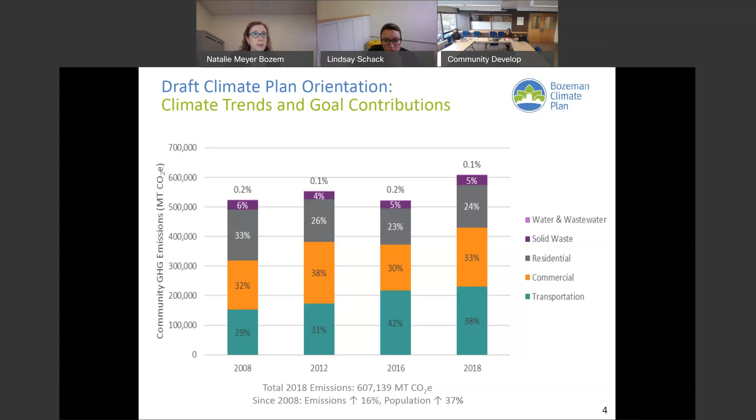In our public engagement process, we heard about a lot of really ambitious, exciting ideas. It's easy to jump very quickly to the cost of the climate solutions. Before we go there, we wanted to first describe the cost of inaction.

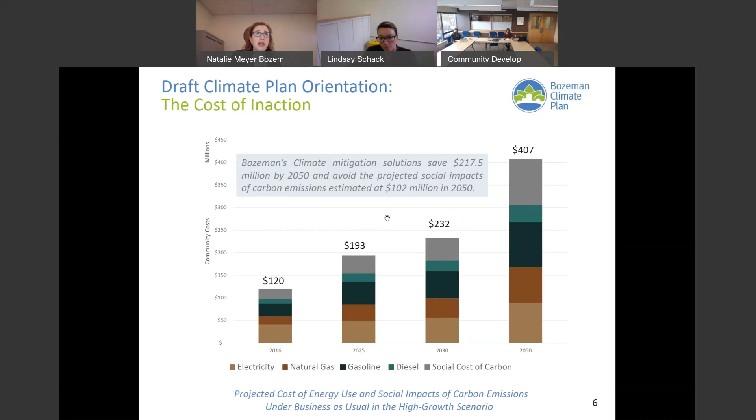In this planning process, we assigned a cost and savings for each of the solutions through 2050. We found that the solutions will save $217.5 million by 2050 and avoid another $102 million in those negative externalities.

The natural disasters of 2020 are just another reminder that we're already coping with the impacts of climate change. In contrast to past planning efforts around climate, this plan addresses both mitigation, reduction of greenhouse gas emissions, and resiliency. To us, that means conserving natural resources, strengthening infrastructure to natural disaster, increasing social cohesion, mitigating property and economic losses, and protecting human health.

In conjunction with the climate team, we developed this vision statement, a position statement for the planning process to guide the development of the plan as well as implementation. Through leadership and collaboration, the City of Bozeman will advance innovative solutions to cultivate a more equitable and resilient low carbon community for current and future generations.

We've also developed quantitative metrics for this plan. There are 3 really ambitious goals. The first is that we will reduce our emissions 26% below 2008 levels by 2025. This is aligned with the Paris Climate Agreement, which the city committed to uphold back in 2017.

We'll achieve 100% net clean electricity by 2030 and carbon neutrality by 2050. These are ambitious goals, but we were deliberate in establishing them because they're the metrics that science tells us we need to achieve. We're aligned with a lot of other communities in Montana and around the world.

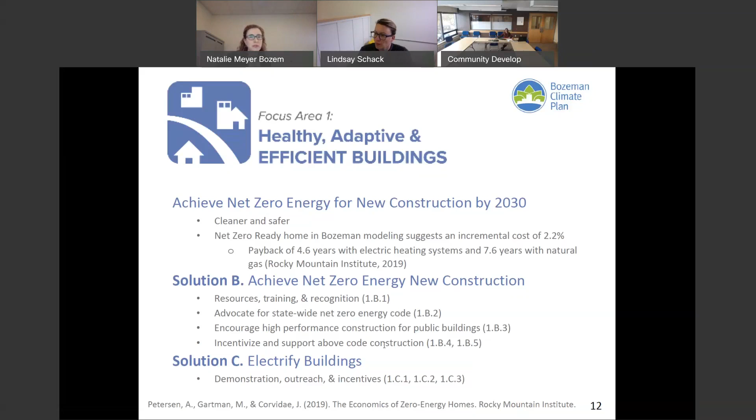On the topic of renewable energy, we mostly want to emphasize that solutions related to renewable energy focus on utility scale, and that is in large part because it's the most cost-effective and scalable for residents. So we consider that to be an affordability consideration.

There will also potentially be opportunities for green subscriber-based green tariffs, where people would have the option to buy renewable energy. Here we've discussed the possibility of a low-income carve-out so that it's more equitable across the board.

On solution F, increasing community-based distributed renewable energy, this is really just rooftop solar, and we talked about streamlining solar permitting and adopting a solar-ready code provision that's called out in the 2018 International Energy Conservation Code, which will be adopted in the new year.

The third focus area is vibrant and resilient neighborhoods. I want to highlight solution G, facilitating compact development patterns, which is one of the biggest drivers in encouraging multi-modal transportation and reducing vehicle miles traveled. This enhances walkability and affordability. We talk about examining the code for opportunities for additional density and mixed use to make our community more walkable.

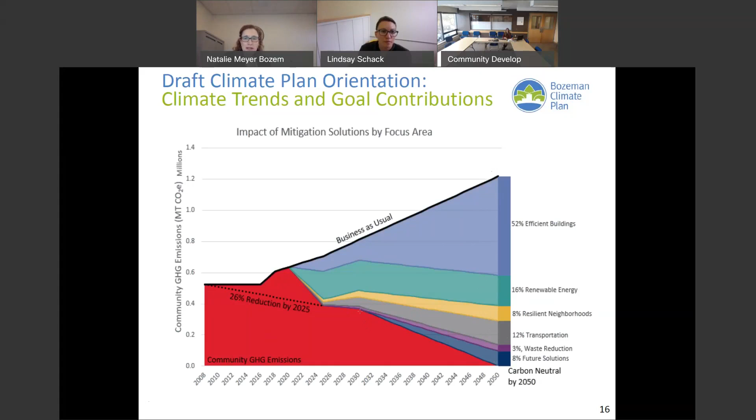It's important to highlight that over half of our potential emissions reductions will come from building energy efficiency, net zero energy construction, and building electrification. That's followed by 16% from renewable energy, 8% from compact development, 12% from transportation solutions, 3% from waste solutions, and 8% from future solutions we have yet to identify. Those will really come into play after 2030, and we feel confident the bright minds at MSU will help us with that remaining 8%.

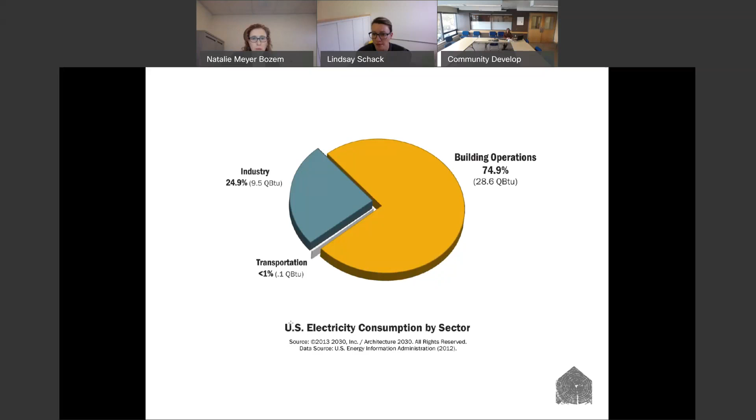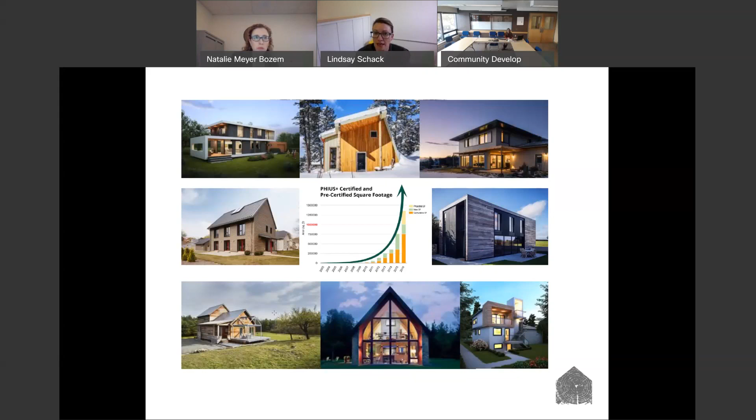For climates, it's possible across the globe through lots of different approaches. There's 5 principles: affordability and the choice of new structure, principles that I think we should be aware of, things we can do to get us to optimal energy consumption, and doing that while being overall carbon-conscious, having a positive impact through our buildings.

The first thing you can do is orient your building properly on solar orientation, with a certain amount of insulation all around your structure. Of course, you need high performance windows, and your windows work with your heating system. Then you need a measure that has environmental sensitivity: an airtight enclosure with ventilation that results in clean, healthy air.

So with environmental sensitivity, perhaps you find yourself in Montana. This home actually does that, because the same system that's keeping the house at a consistent temperature is the system delivering fresh air inside at all times. These 5 things basically get the building to operate like a machine.

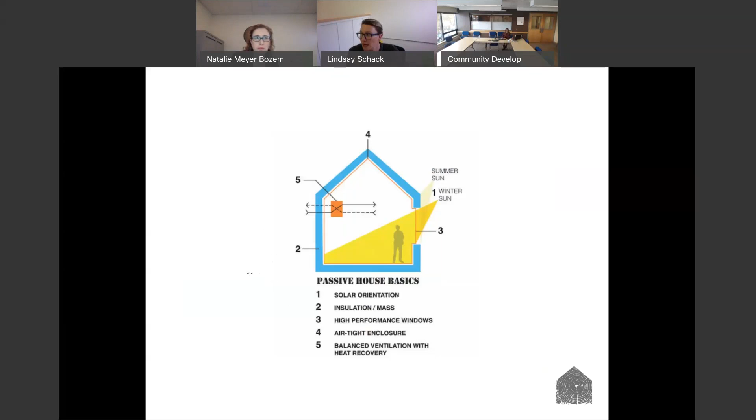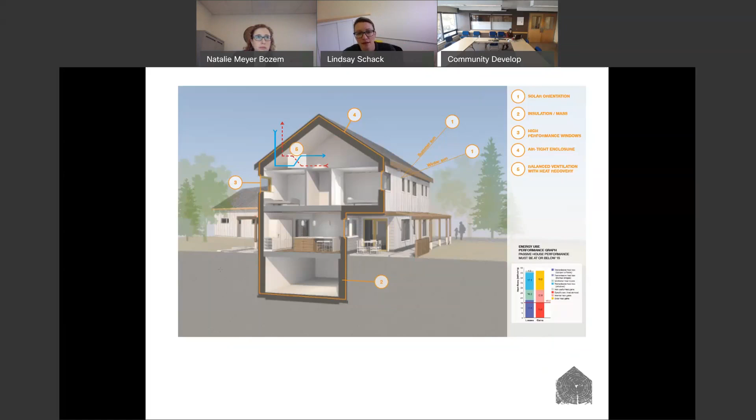If you could go to this home — it's well timed. She has a set that is in the process, and she'd been away for more than a week with no occupants. When we had that really cold spell at the end of last weekend, she texted me this morning and her house was still holding temperature.

I said, they're active people — cold weather came through, nobody was there to turn the heat on, and despite the cold weather, it's really good to show how well it stays comfortable.

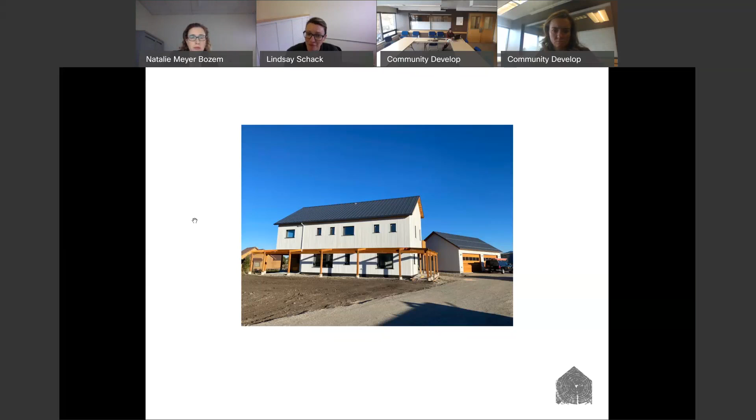This is a simple shape, but full of spots of interest in some ways — this is a project worth noting.

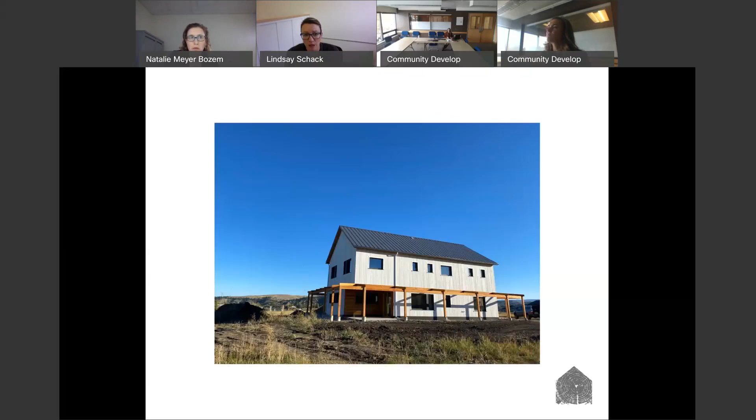And then quickly, the other project we have on the board is in Jackson, Wyoming. Oh, last thing on that one — we're collaborating.

They're a passive house expert, and we're working with affordable housing in order to build a 24-unit project using tax credits. We're not sure yet if we will, because it goes through the state, and they want to put their tax credit project in Jackson — it remains to be seen if we'll get to build it.

I wanted to mention it's a workforce housing project, and it's intended to be certified — but if we don't hit certification, at the very least it is a structure that operates at a minimum, so there's less energy required by code right now. We understand we can build passive house correctly.

So this project brings that knowledge and is really great for the tenants, but it also creates a great town — the occupation of those buildings will benefit not only the tenants.

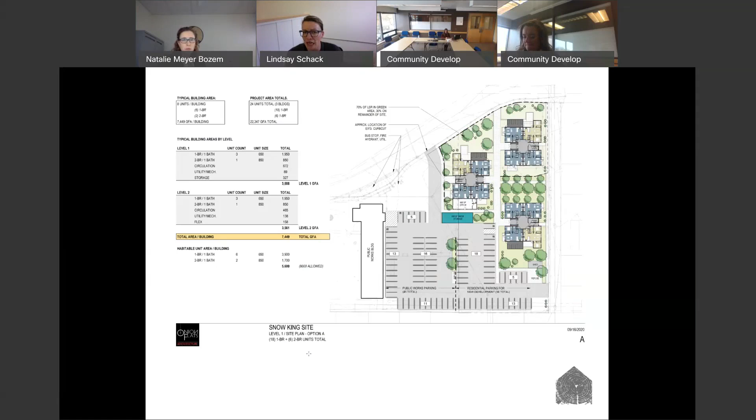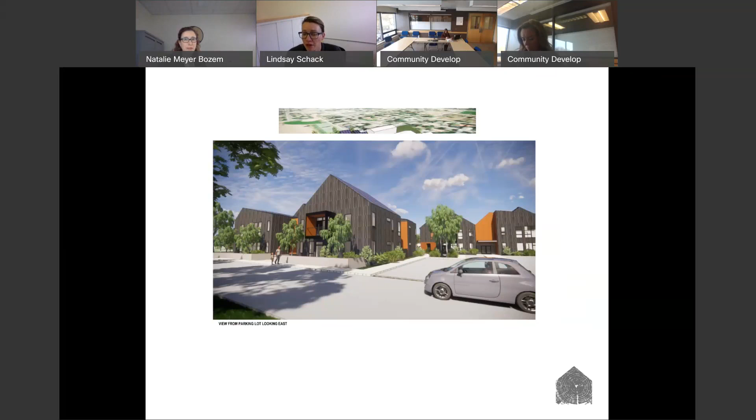So Tanya, do we have any discussion or Q&A in the chat? Can you hear me at all? Can you hear me? Yes, we can hear you now. Sorry, I'm called in on a phone and a phone system and the computer, so I apologize. Is it echoey? Sounds fine to me. Okay. I don't see any questions coming in yet. Do the folks in attendance — there are 16 of us — does anybody have any questions they'd like to type into the Q&A box?

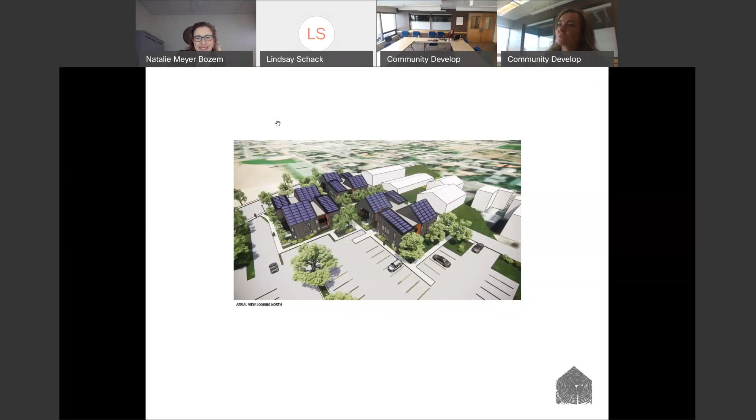Are there examples around town that you know of, projects that are piloting or giving some of these building practices a try, that are specifically affordable projects?

I don't have them at the ready, but there are a couple of projects that are single family homes. One's in Belgrade, in the Las Campañas, near the interstate—you can actually see this house from the interstate, I think. That was built by Habitat for Humanity. I believe they completed it in 2017, so it's been there for a while.

It didn't reach Passivhaus standard because I think it missed the blower door test for air tightness, but it's otherwise built to the method, and that is an affordable project. There's another couple in Bozeman that are pretty close to passive but didn't quite hit the standard, which means they're still really excellent buildings. I couldn't speak to the affordability of the other ones, I just know the one in Belgrade was built by Habitat for Humanity.